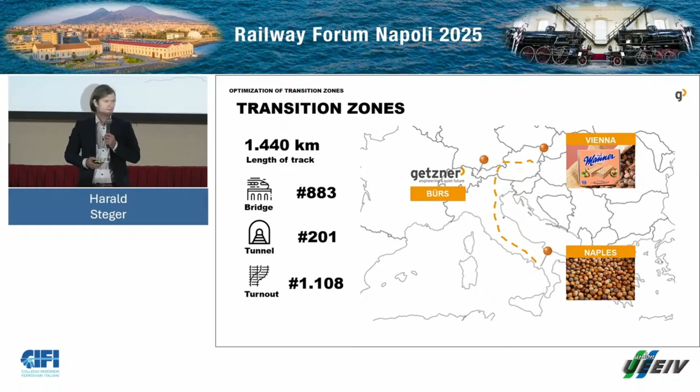But this is not the only cross-link between Vienna and Naples. There's a railway line counting approximately 1,400 kilometers. And if we would let those wafers travel from Vienna to Naples, these wafers would pass by approximately 883 bridges, 201 tunnels, and 1,108 turnouts.

Broken cookies do not have calories. But in analogy to that, how do broken components weigh in the track? So what would happen if this wafer would transit from Vienna to Naples the rough way? This brittle wafer would completely crack.

After the storytelling about wafers, let me now proceed with the technical presentation and the analogy to the transition zones in the railway track.

So what are transition zones in a railway line? We consider transition zones as track areas where we have a change of superstructure that leads suddenly to a change in vertical track stiffness, such as transitions from an open track to a bridge or a tunnel.

Another example is a transition from a ballasted track to the slab track. It could also be a transition from a regular track to a turnout area, or even within the same superstructure, like within slab tracks, there could be transition zones. Yesterday we heard that we sometimes have different spacings available in the same tunnel, and we have to choose different slabs and different mass spring systems, and even there we have to smooth out this vertical track stiffness to optimize the transition zone.

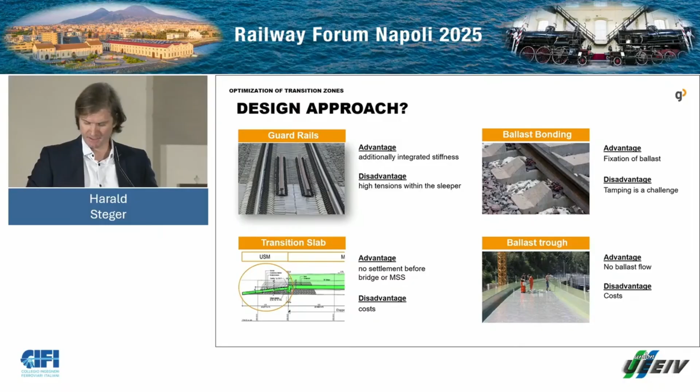Ballast bonding leads to fixation of the ballast on one hand, but is problematic whenever you have to do maintenance work, and it's a hindrance for tamping of the ballast bed. A ballast trough prevents the ballast from flowing apart, and again, it's an individual solution that causes more cost.

Since I'm a Getzner guy, of course, I have to be convinced, and I am, and I'm passionate about that.

The alternative solution to constructive measures is the integration of elastic components. So what is this approach about?

Integration of individually designed elastic components helps us to level out the track stiffnesses. Elastic components ensure that we have a better load distribution, we can elongate the bending line, and this, as a consequence, leads to minimizing of the settlements and improving the track quality, and improving the track quality over the life cycle means also we can reduce the maintenance cost on long term.

Which elastic solutions do we have available? The elastic solutions are available for all kinds of railway superstructures. For ballasted track, we can integrate under ballast mats, we can integrate sleeper beds, or we can do the stiffness graduation with rail pads. For the slab track, we have available mass spring systems, we have insertion beds for sleeper boots, or we can integrate base plate beds.

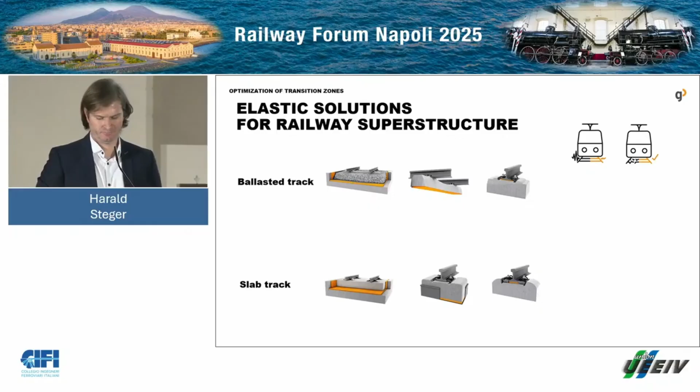When you design a transition zone and you want to optimize this, there arise two questions. The first question is how to smooth out the stiffness changes, and the other one is what is the ideal length for a transition zone.

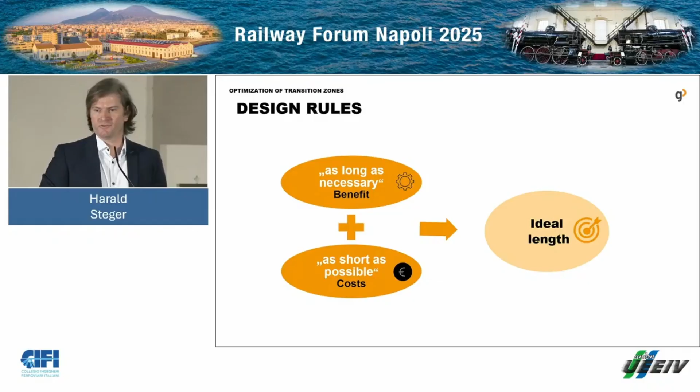And there's first of all a quite generic thumb rule. You have to find a compromise between the technical benefit, that means the transition zone should be as long as necessary. On the other hand, you have to have a view to the cost aspect, and that means it should be as short as possible. At the end of the day, the generic thumb rule leads to the ideal length.

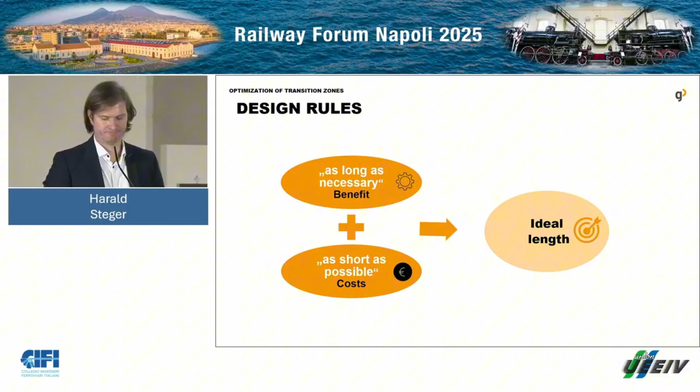But there are also more quantitative rules to design the optimal length of a transition zone. The minimum length should be considered as the distance of the bogie, for instance, 10 meters. And for the right design for the transition zone, there are several rules counting a distance according to the 0.5 second rule, the 0.7 second rule, or the 1.0 second rule. What does this mean? I will bring an example on that.

Imagine you have a train which is running 125 kilometers per hour, and following the 1 second rule, it means this train with this velocity covers a distance of 35 meters within this 1 second. And this brings you to the ideal length of a transition zone.

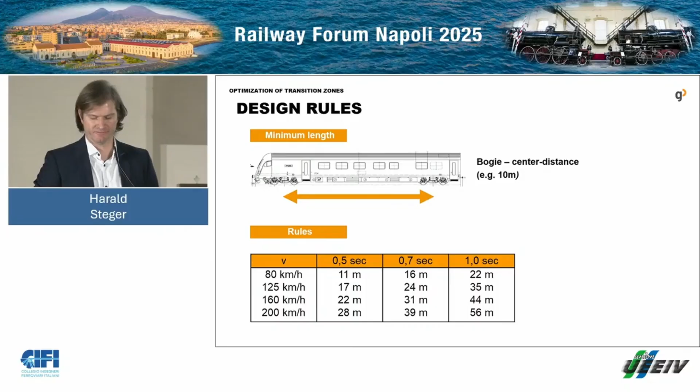When designing and optimizing transition zones by integration of elastic components, we have to find a FEM model that allows us to compute the transition zone as a whole. And therefore, it should be capable to consider different parameters. First of all, we have to have the inputs for the different superstructures. So the model should consider either you have a sleeper for the ballast track or bi-blocks for the slab track, and should also be able to compute the different geometries within this transition zone.

Secondly, since we are Getzner and want to integrate various elastic components, this should also be reflected in the model. Those two columns I would consider as input parameters. And the third parameters that the FEM model should be capable to calculate are the output parameters. As we have this change in vertical track stiffness, we need to be able to calculate the rail deflection as well as the rail seat force and the sleeper tension.

After the theoretical model and our approach, let me introduce you to one of our reference projects we were honored to be participating in. This first reference is located and was projected in Switzerland, in Samedan.

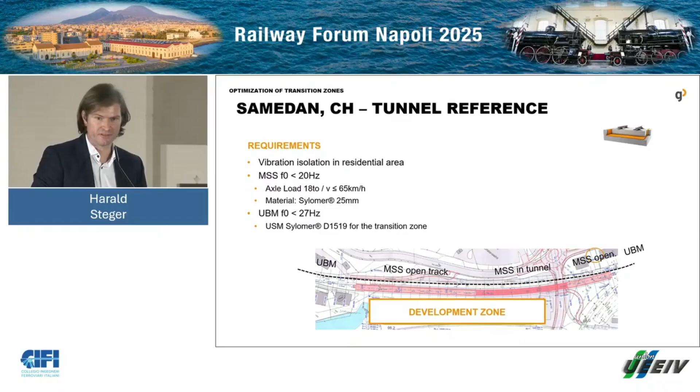In addition to that, this was a combination of constructive measures and elastic measures. There was integrated under the ballast mat area, there was integrated a transition slab. And the requirements for this project was to achieve a minimum difference in vertical rail deflection lower than 1 millimeter at the running train.

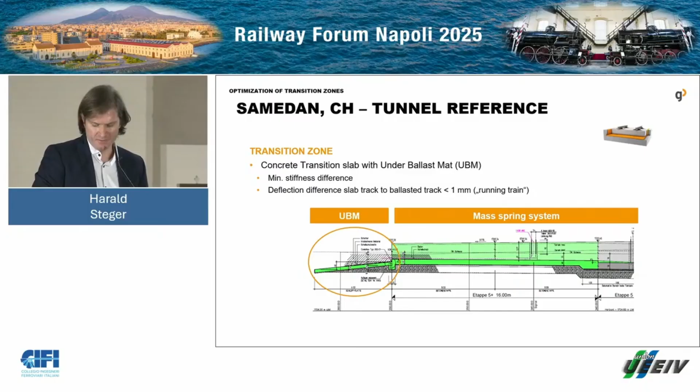This shows the design and the installation. We can see here the under ballast mat on the transition slab. And this panel for the transition slab had a length of 8 meters.

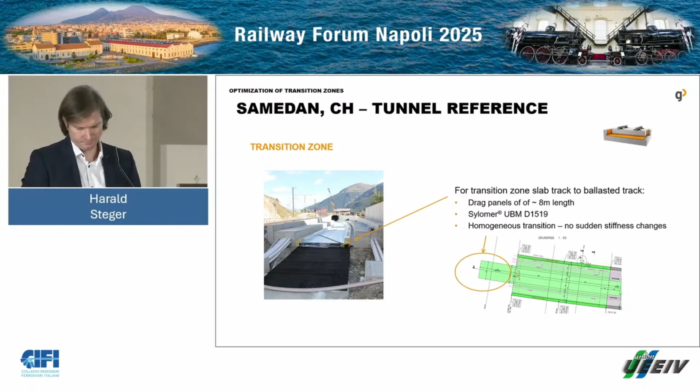Let's switch to the transition zone, which we call turnouts. Turnouts actually define the efficiency of a network. In terms of investment, they cause approximately 1% of investment cost.

At the same time, for maintenance, 25% can be related to turnouts.

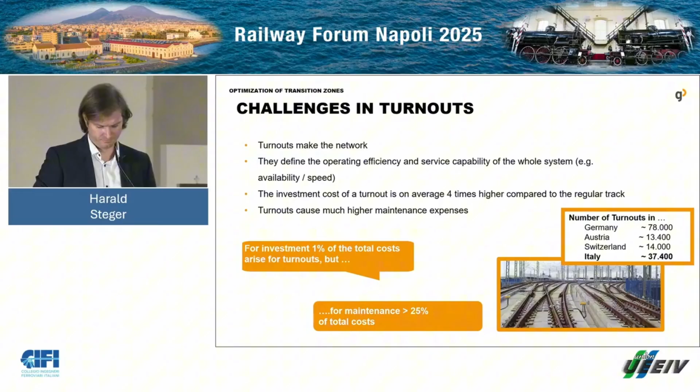A turnout is a transition zone with the highest complexity, an area with the highest discontinuity of track geometry. We have the main track and the side track. When we run over the side track, it leads to a tilting effect. With elastic bearings, you can smooth out this tilting and smooth out the graduation of the stiffness.

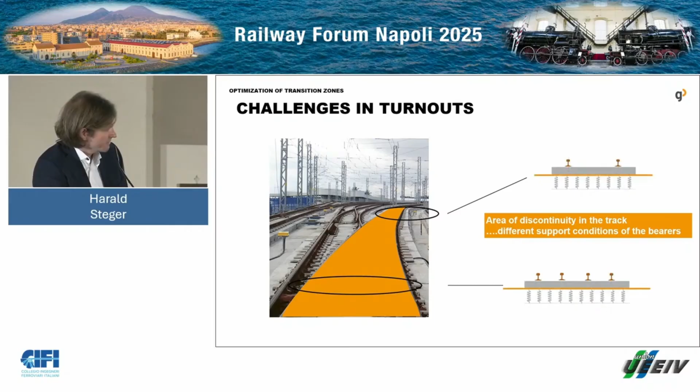Here we can see a sketch of a turnout explaining again the complexity. At the turnout entrance, we have the standard sleepers, and when going along the turnout, we're entering the frog area. The frog area is the most critical area, because there you have the highest complexity of discontinuity.

In the frog area, at the end, when entering the exit of the turnout, you have a transition from the longest sleeper to the shortest, which is the highest complexity in terms of discontinuity and also leads to the highest tilting effect.

So that means the before introduced FEM model needs to be further developed, reflecting the challenges that we are facing in a turnout. That means we have to be able to deal with eccentric load impact and tilting, and also we need to be capable in the model to reflect the different geometries of the placement beds in the fastening above the sleepers.

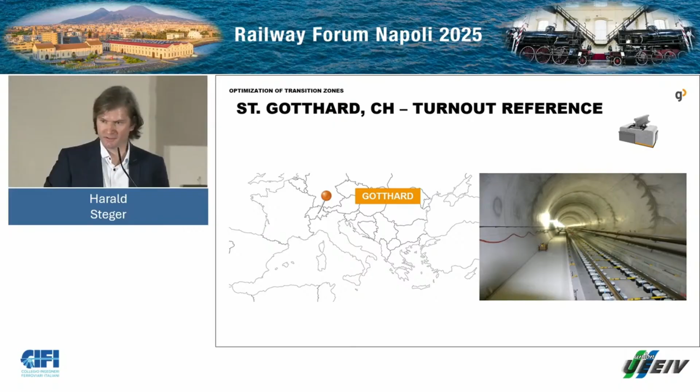Let's continue with one of the projects for turnouts where we had the honor to participate: the worldwide known St. Gotthard tunnel, the longest railway tunnel in the world so far, operated by SBB, constructed between 2009 and 2016. In total, in this tunnel, there were installed more than 400,000 elastic elements from Getzner.

These were insertion pads for sleeper boots. And in this tunnel, there were also 10 slab track turnouts installed by VAE turnout systems.

What was the service that Getzner provided? Together with VAE and based on the input parameters from VAE, we had the honor to do the prognosis for the rail deflection across this turnout, and we made installation plans.

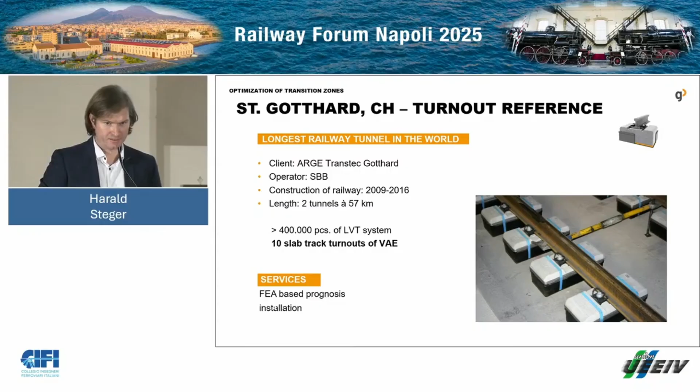What were the prerequisite conditions there? The trains running there had an axle load of 25 tons for the calculation, and the design speed was 250 kilometers per hour, which means the turnout is passed over within 1 second.

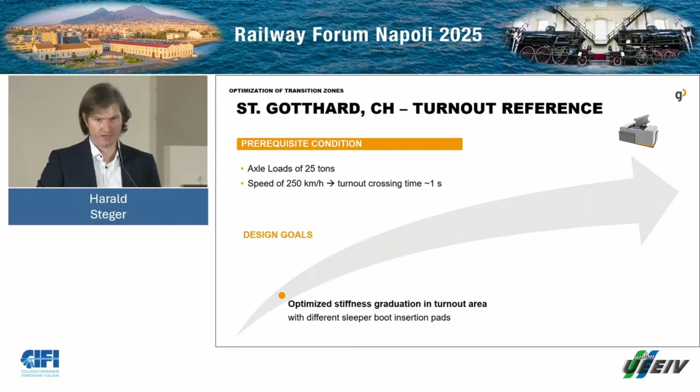The design goals we had to achieve: we needed to optimize the stiffness graduation in the turnout area with different kinds of sleeper boot insertion pads. The transition between the LVT system and the long sleeper had to be considered and optimized, with a static rail deflection in the LVT system in the straight area of approximately 1.5 millimeters. The major goal was to have a maximum difference in rail deflection along the entire switch of less than 0.5 millimeters.

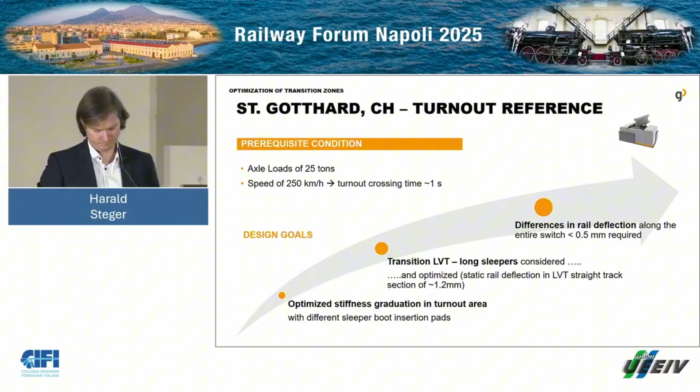Based on the further developed FEM model, we started design, and the solution can be seen here. We have the standard straight track with the LVT system, transitioning to the turnout where we have the long sleepers with insertion bed, a different type compared to the straight track.

In the frog area, it was a combination of two different types to smooth out the tilting and the stiffness change. At the exit of the turnout, we again had the same bed as in the entrance area. So 3 different kinds of elastic beds were integrated into the sleeper boots.

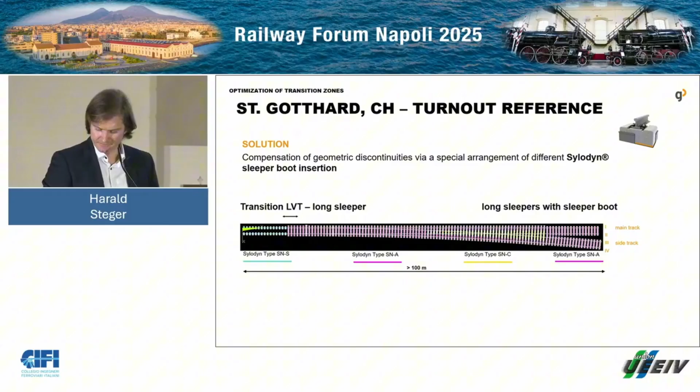And for this, we calculated the rail deflection. First, for the main track. The main track consists of two rails, rail number 1 and rail number 2.

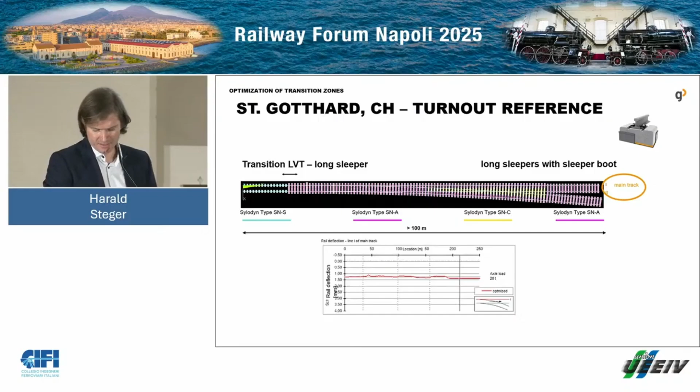Here we can see the rail deflection line for rail 1, and in the critical area where there's the frog, we smoothed out the rail deflection. It's quite smooth. Same for the second rail, and then we built the average for rail 1 and rail 2.

The same calculation was done for the side track, for rail number 3 and rail number 4, and the average was built. Based on this design, we generated the installation plans, and the installation was executed according to our design.

I believe in the philosophy, a job is only done if it's done. What do I want to say with that? First part was done: theoretical model was there, design was done. How to get to the second done, to have the done? We have to get evidence that the theoretical model is verified.

Therefore, the contractor engaged external authority, Technical University of Munich, to conduct tests in the prospective turnout close to the area of Erstfeld in the tunnel in St. Gotthard. The measurements took place with a set of trains of the type ICS with an axle load of 19.8 tons. The trains were operating during the measurements at 250 kilometers per hour on average.

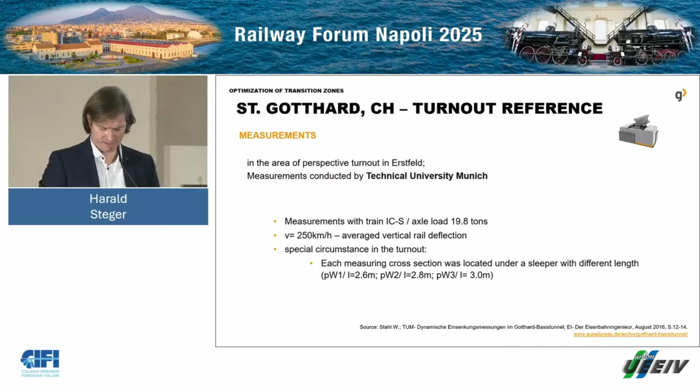There were special circumstances in the turnout for the measurement campaign. Each measuring cross-section was located under a sleeper with different lengths: one under a sleeper with 2.6 meters, 2.8 meters, and 3.0 meters.

In the turnout area itself, specifically in the frog area, the critical area, we had an averaged rail deflection measure of 1.75. So finally, due to my philosophy, the job is done because we have the evidence and we have proven that the theoretical model is the right model.

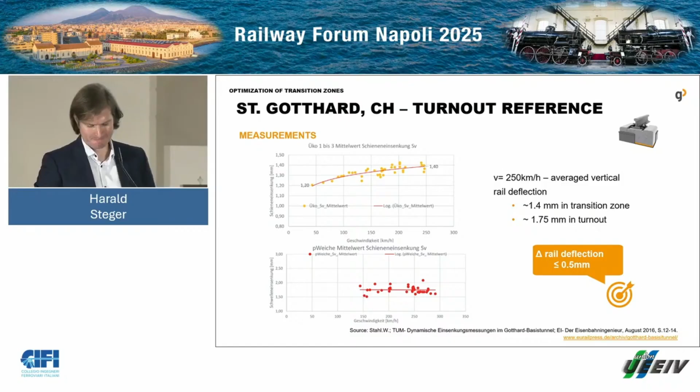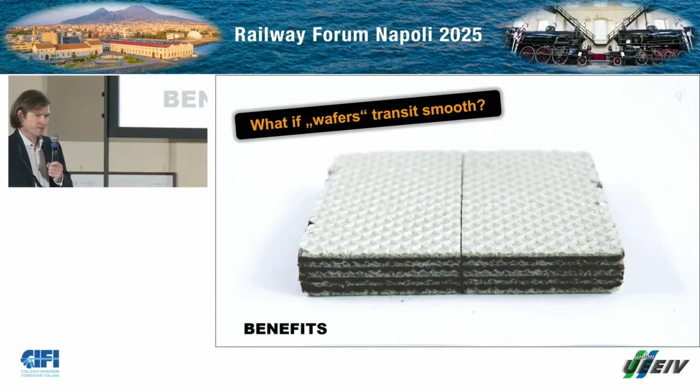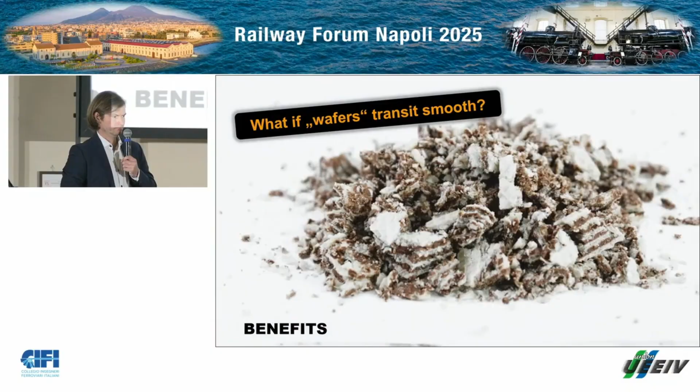I started my presentation with storytelling about wafers. Let me conclude my presentation in the same manner. So what are the benefits for the wafer if you optimize the transition zone and this wafer respectively? The railway components are protected in a smooth way. These wafers would arrive in a perfect condition in Naples.

Let me summarize the benefits of optimization of transition zones. On one hand, by improvement of track quality and protecting the components, you improve operational reliability, you generate higher profitability. That leads to more safety and improvement of track quality at the end of the day.

Now I want to repeat a statement from yesterday from my valued colleague from Rhomberg Sersa, Stefan von Brunn: build and forget is not your approach, it's also not our approach. Build and forget, we completely regret. So what does it mean? You only benefit from the benefits if you're able to have them in the long term, which leads me to the last benefit.

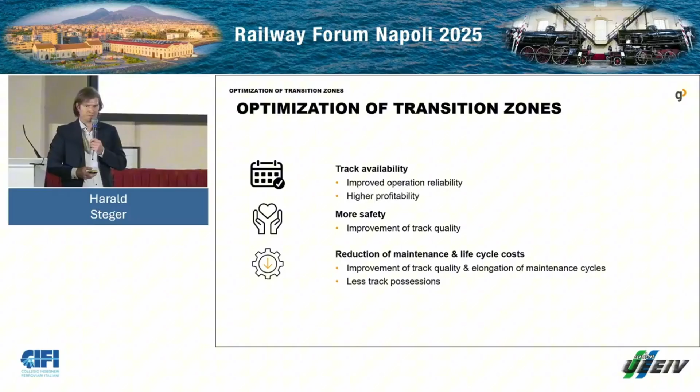The improvement of track quality needs to pay off in terms of the lifetime of our railway superstructure, and needs to reduce the life cycle cost, which is achieved by optimizing the components, optimizing transition zones, and protecting components.

So the key takeaways from today's presentation: transition zones have a really high impact on our railway lines. There's a huge number of transition zones within a line. Remember, from Vienna to Naples, 1,400 kilometers, there were quite a huge number of turnouts, more than 1,000 turnouts. We need smart solutions to cope with the challenges in transition zones, and this allows us to optimize our resources.

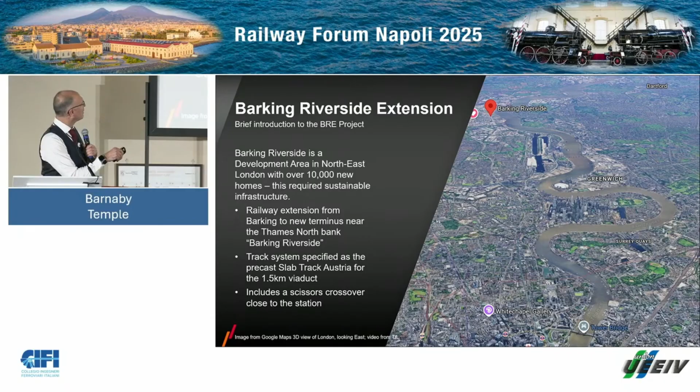So firstly, what is the project, and where is Barking? Barking is in London. If you've ever visited London and been to the Shard, this is approximately an image from Google Maps looking east from where the Shard is. You can see the Tower of London, Tower Bridge, and if you look quite a long way east, you see Barking and the River Thames winding its way.

This project extended an existing line from the station at Barking, hence the name Barking Riverside. The extension took a spur off the line to a new station near the river, to support a big development of new housing. There was a requirement for sustainable transport, and therefore an extension to what became the London Overground extension was decided for the new population.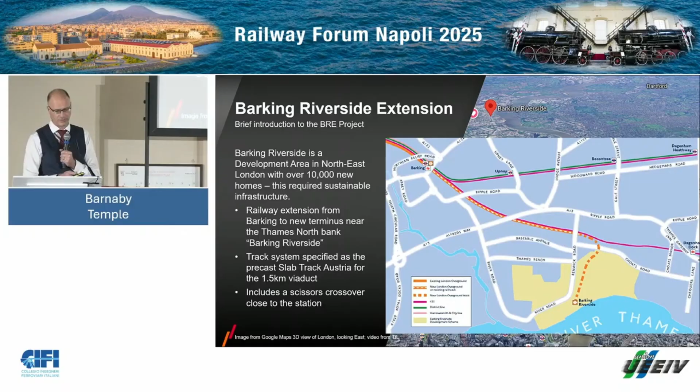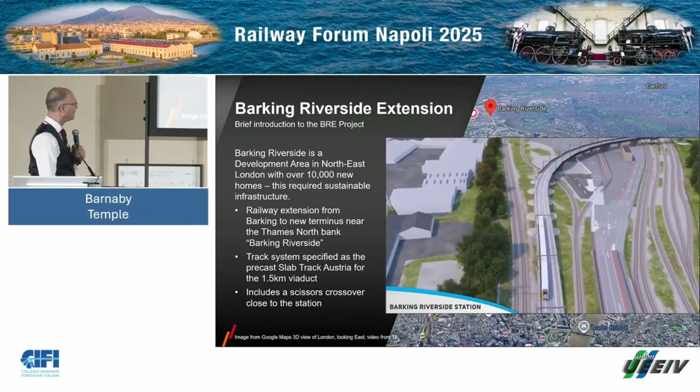Here's a short video that shows the simulation of the project before design and construction. The extension takes its way up a ramp, over some railway lines and a depot, over rivers, then under some power lines, and then takes another curve around the development, schools, houses, past a power station that's there, then through a junction and into the Riverside station.

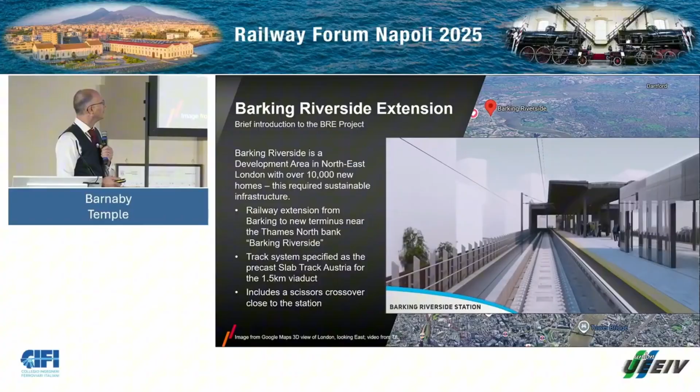If you're sharp, you'll notice square windows in the precast element, which is an indication that it's actually the Porr STA system that was selected for the project.

A little bit on the timeline: our involvement actually started well before construction, in 2017, when Arcadis, who was selected by Transport for London as the designer, needed some help with what the client wanted. The client wanted slab track, specifically precast slab track, and Arcadis didn't have that experience. So we were brought in as advisors to help, and we even took them on a site visit, courtesy of Porr, in Germany, to see some installations, so they got a better feel for what they were designing for, because they were designing the substructures and viaducts.

Moving on a year to 2018, we got involved again, this time directly for Transport for London, because Arcadis had done a track-bridge interaction study. It was important that this got reviewed, because there were some pretty critical aspects for planning, tendering, and construction that the client needed to know but didn't have the expertise in-house for. So we supported them in assessing what the study had shown. And what it showed is they needed to do it again, actually, but we'll come back to that.

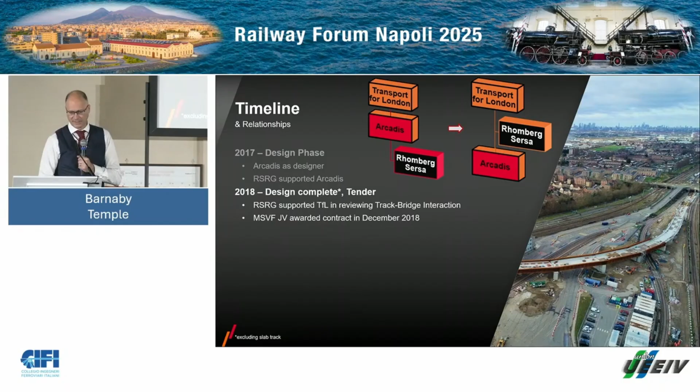The tender for the main works civils contract was completed in 2018 with the appointment of the Morgan Sindall Volker Fitzpatrick joint venture, and we were appointed as their subcontractor for design and build of the slab track. We were supported in that by VCE, our specialist designer. That design process went on until about mid-2020, and if you remember the COVID timeline, that did interrupt the project program a little bit, delaying construction. The viaducts took a little longer because of that, and our installation was still affected by some COVID measures, so there were some disturbances to the smooth running. In 2021 we were able to install the slab track, and the line opened in 2022.

So a little bit more about the route in detail. Firstly, I mentioned the ramp. There's the ramp, it starts just underneath the road bridge, and has to get to a certain height to go over a railway line.

Then there's more railway lines. This is actually a freight depot. And then the High Speed 1 railway tunnels run under here, so a raft was built to help protect that.

And then this curve runs around a 220-meter radius with steel girder viaduct decks, and then onto a predominantly concrete viaduct, all the way through round to the station, which is there at the end. So the junction is there, the station is there.

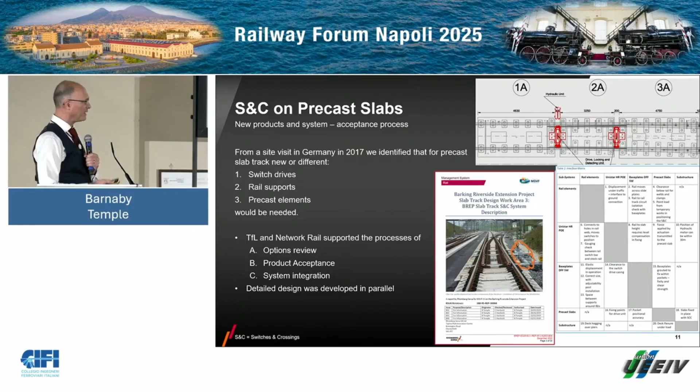So the precast elements, worth a quick mention of why they look a little bit different. For a couple of reasons, we decided not to cast the precast elements with the bolt fixings already in their precise positions. One was because we were on a viaduct, and there was quite some concern that there would be some deflections when casting things in place.

And that was because with a long viaduct deck of 100 meters and a longitudinal drainage concept, the depth of the self-compacting concrete under the precast slabs was quite deep. And therefore, the addition of weight was felt could impact the geometry quality. How significant that was in the end, it wasn't as much as feared, but nevertheless, having a separation where we actually fixed the fastenings in a final step solved that problem.

There was also the question of how good the tolerances would be achieved by not just the precast manufacturer, but specifically also the S&C manufacturer, which had already been selected and was predominantly a supplier for a lot of turnouts for ballasted track. And it wasn't high speed, so there was some concern that if we tried to be too precise up front, then we could have some problems in positioning.

So I'm not going to say too much about elasticity, you just heard from Getzner. The same process was adopted in configuring the baseplate system, which was provided by Schwihag. And there you see the Unistar switch drive system, which had been used in quite a few countries before.

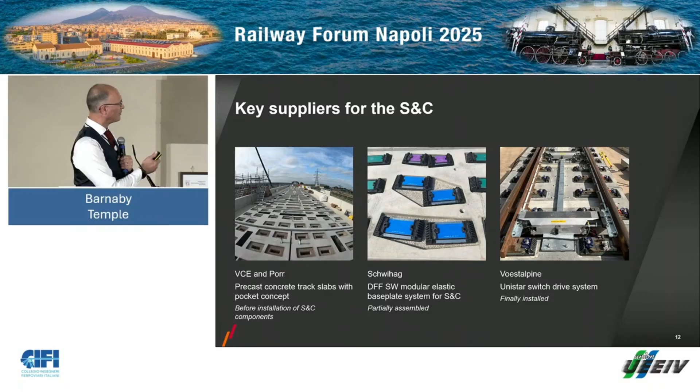So mentioning other people, there was a lot of people to work with on a project, there usually are, but this is just an indication of the range of them. Involved in the track, quite a few different people. Pod Trak were doing welding for us, but apart from that, not too much.

Porr and VCE doing the detailed design for manufacture for the precast panels themselves. And then we had the switch drives, but a different installer. So all of these we had to work alongside. And Network Rail were involved, even though they weren't the project client, they were indeed the end client.

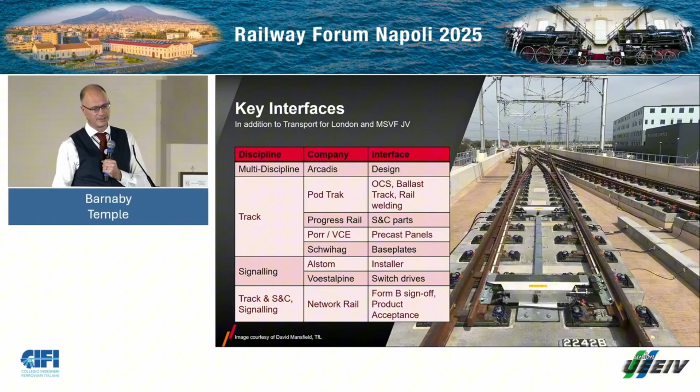The second key issue is track-bridge interaction, and it's a pet subject of mine now.

It's very interesting and not always completely intuitive, but basically bridges do their thing and track has its behavior, and when you add them together they're not always 100% compatible. So it's important to understand that the track has certain levels of stress in it, particularly in curves. There are additional effects in curves, and stresses in rails are different, so that when you superimpose the behavior that a bridge wants to do, which is expansion, contraction, flexure to some degree, the track system has to be able to deal with that.

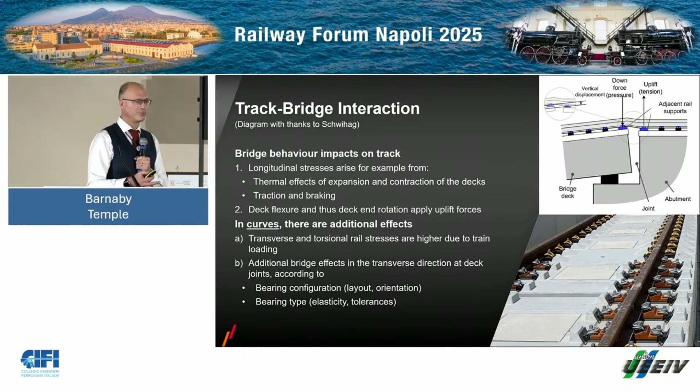So if the bridge designer doesn't really comprehend the seriousness of that, then they can make a design that's actually quite difficult to put a track on. And in this case, we had to deal with some deck end rotations and some translation movements vertically and horizontally at bridge decks.

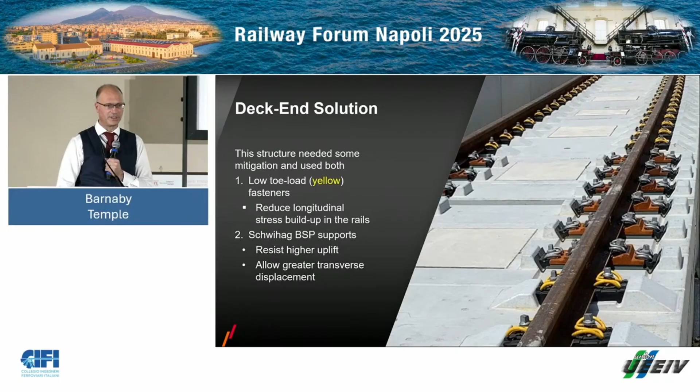Which meant we ended up with a particular arrangement which we'd actually seen in Germany already, the Schwihag BSP support point, which allows a little bit of extra movement and has some uplift resistance. And that, in the design, we proved once we'd fully interpreted the designs done by Arcadis, we were able to implement as a team, with VCE doing the detailed design of the track slabs and the arrangement, fixing those to the deck underneath.

Sounds simple there, but actually it took quite a process to explain the challenge and why it was additional work that we had to do in order to make it function. So it took a few months to get through that process of realizing the change was needed and delivering it.

In total, the design required over 700 panels, but over 100 different geometries, because of the curvatures, because of the deck length limitations, because of some specific details, plus the S&C. There were quite a few different precast shapes required, so that did involve quite an effort from the design team.

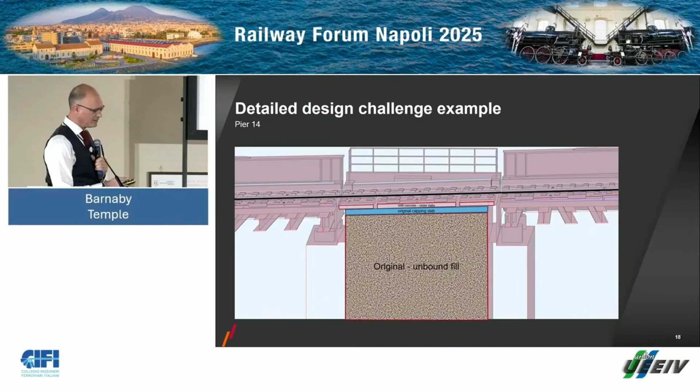Here's one of the examples where we had to get involved and try to adjust the original design. At pier number 14, it was a big pier for an emergency walkway concept, and it fitted between two transport ways underneath. One was a road.

I'm just going to step quickly through the reasoning we had to go through. So the first one was they wanted a big box full of fill, and big boxes full of fill are not that easy to compact. So their design was to sit a capping slab on top of the fill, and then have us cast the track on top of that. And we had to explain in graphic detail why that wasn't going to work.

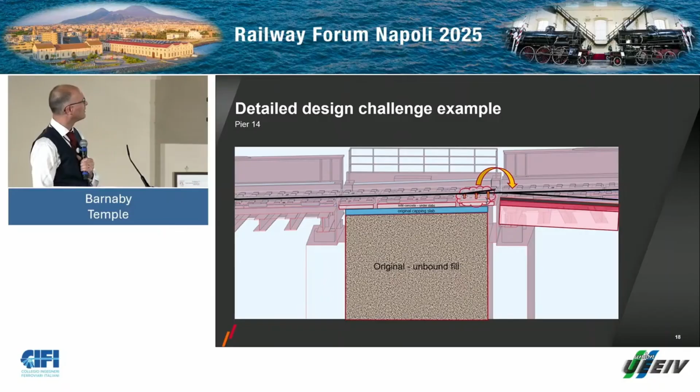So when the deck flexes, you have some uplift. There's going to be some settlement in the fill, which means the track system is going to rotate a little bit. You also have a bit of traction and braking, and basically it's going to crack. It's not going to work, it wasn't going to last.

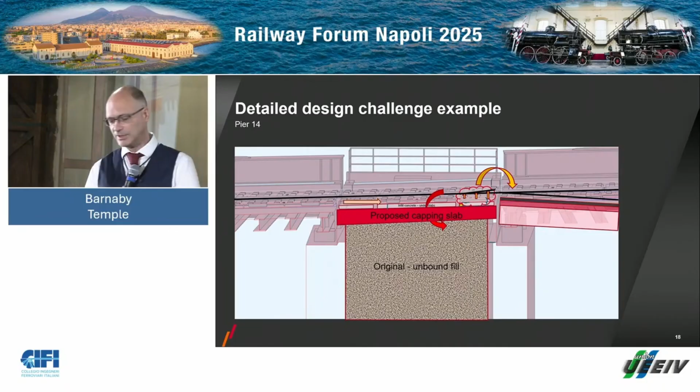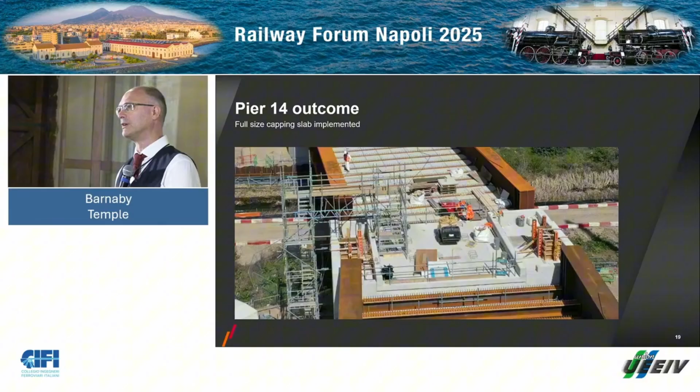So we were able to persuade them, after quite a lot of persuasion, that they really should provide something a little bit different. And indeed, that is what was generated in the end: they designed a trough-shaped capping slab that actually sat on the pier, which meant they didn't have the safety issues of lowering people and plant in to provide the fill.

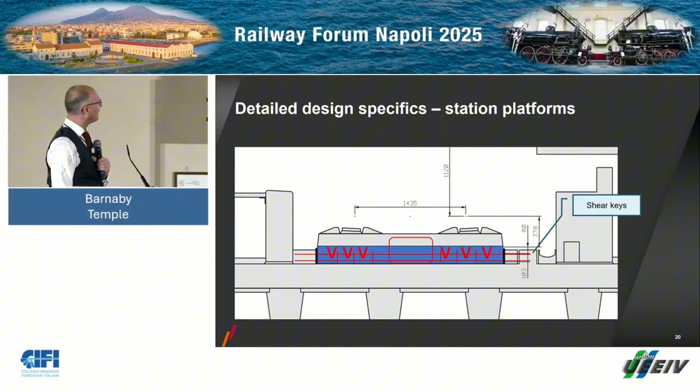The station was also a pretty complicated area. It was done by a different design team from the structures designers, mainly expert in the buildings area, and they gave a very complicated shape that we had to fit with, which had some shear keys, some waterproofing things, and it was quite heavily reinforced. The real challenge was how could we provide the track system into that space in a sequence that would work.

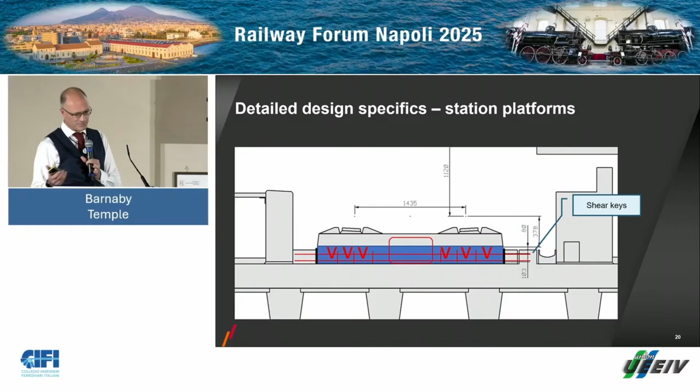This is where the key interaction between construction planning and design really needs to work hand in hand, which is why I mentioned collaboration. It's good to know each other really well and be able to push ideas to and fro to come up with the right solution to make it buildable. In this case, it included development of a piece of plant which had to be bespoke because of the size of everything, which we then used elsewhere on the project.

But we actually ended up designing the concrete layer to be done in 2 stages. One actually supported the plant, and the second one then enabled everything to be delivered. The second stage of concrete was filling in around the slabs.

So we move on to installation. Planning for installation was pretty important. There was quite complicated logistics on the site, so we made use of 3D tools for that.

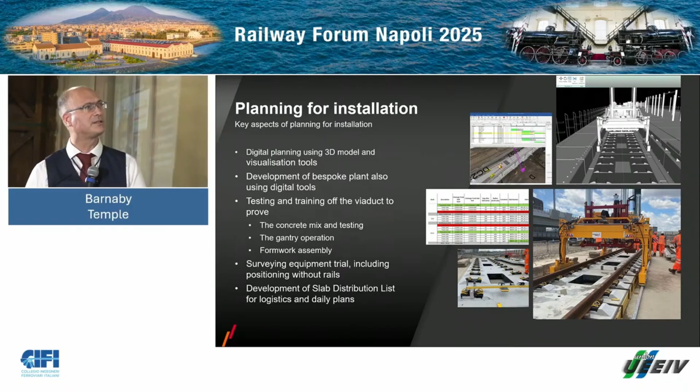This is how we were handed over the viaduct, with stirrups designed to fit the shear keys. This was also designed by VCE. So everything was done on a 3D model to make sure things would fit, and pretty much all of them were cast in the right place.

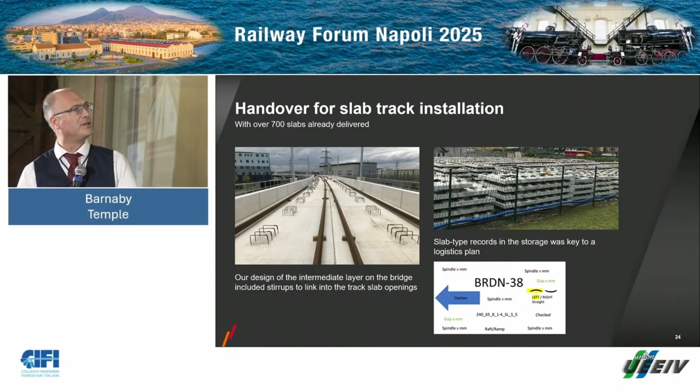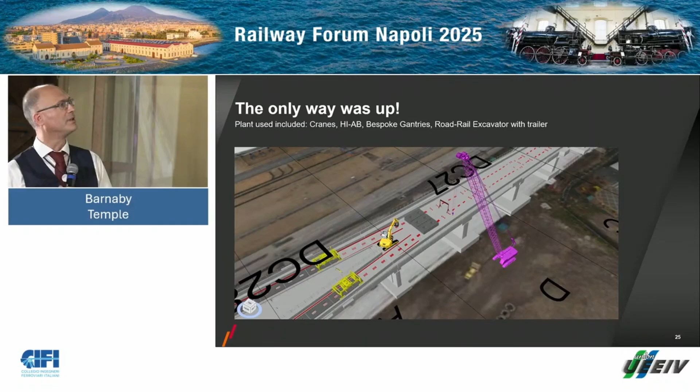Not many changes required. The planning, everything had to be lifted. So there was a place where we could crane things up, and that was the methodology we used for delivering all the slabs, and indeed the plant, to the viaduct.

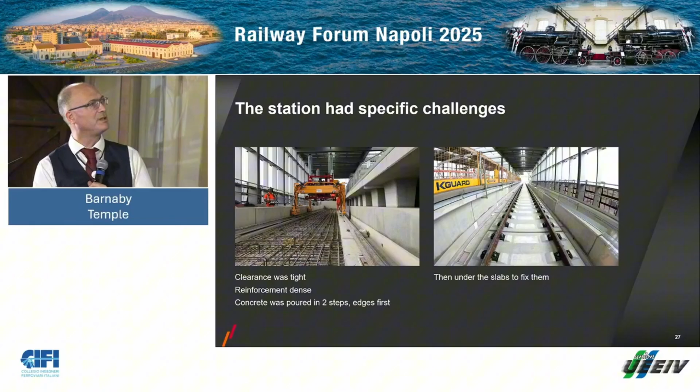The gantries then distributed the slabs into position, in the most part. Here in the station, you see a gantry running on the rails on that side piece, and then on the right you see the finalized condition.

In some places, we could deliver the slabs by crane. At some times, we had to do the final alignment at night. The reason for that was we found the steel girders had an interesting behavior that the designers didn't tell anybody about - because they were weathering steel, which means it's not painted, they're quite a dark rust color, and they actually hogged by up to 16 millimeters in the summer daytime. So we actually had to do the final positioning and casting at nighttime.

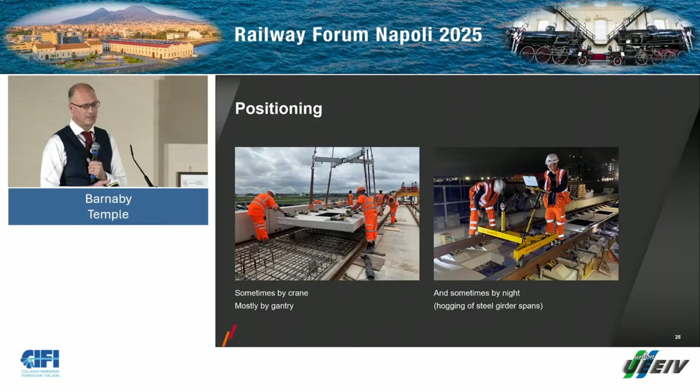We had to install quite a lot of bracing because of tight radii. We really had quite a lot of horizontal forces to counter when we finally got the positioning good. And we had to use a variety of methods of concrete delivery, because the crane couldn't get along the whole way. We had some pumping, we had to use some transport, each of them designed according to need.

Overall, it's a nice result. Nice smooth alignment, despite those challenges. Looks very convenient.

I think that allows me to move quickly onto installation. So, is that going to run? Please, Barnaby, look at the time.

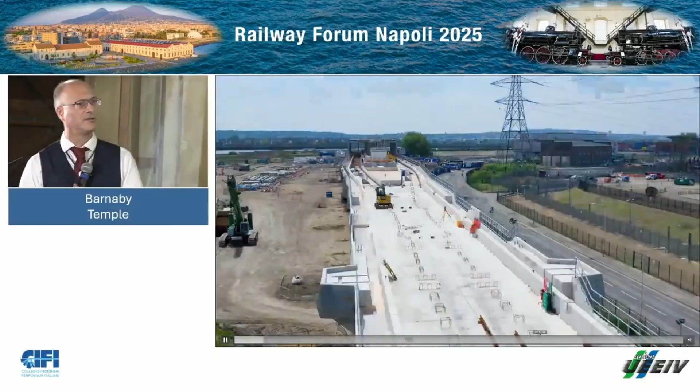So we have a time-lapse video of the S&C construction, which gives an indication of the process. From the bare deck, we had reinforcement because the STC layer, as I mentioned earlier, is a little bit thicker than you might normally have, up to over 30 centimeters here at the ends. Then we have the shuttering, first positioning, concreting of the precast slabs, then a final alignment phase, and everything finished with positioning and grouting of the base plates.

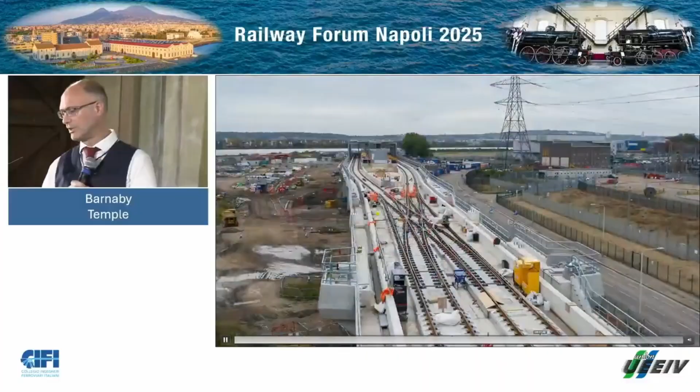And there's some snapshots of that process, so I'm going to fly through those. And there we have the finished S&C. So it's performing very well.

So just quickly wrapping up with some conclusions. I did want to mention BIM again. VCE and ourselves worked with the 3D models, but one thing we did learn, it's not just a question of working in 3D. Implementation actually involves some other dimensions, temperature and time, because with dead load, bridge decks do actually deflect, so therefore understanding your positioning and understanding your structures is pretty important.

And then finally, really, track-bridge interaction, a little bit like was mentioned for the acoustics. It's a cyclic process, really, ideally. Involve your specialists at an early stage, not just one discipline, but both. The track engineers with some knowledge need to be there when the bridges are being conceived.

And final slide, the conclusion. It was opened in July 2022. The track took 4 months, 711 precast slabs, quite a lot of self-compacting concrete, a total slab track route length of 1.7 kilometers, and the client is very happy. So it was a good conclusion.

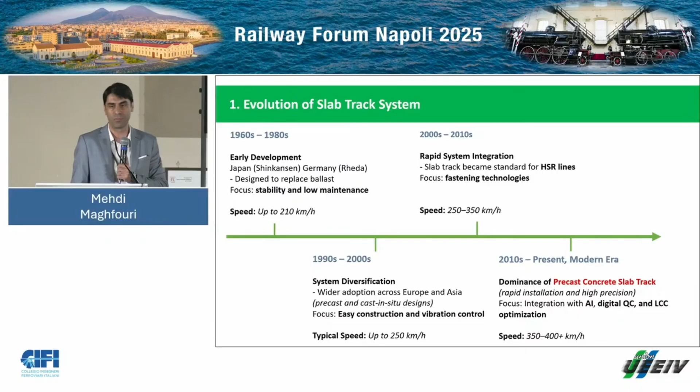But why is there a global preference for the slab track system? Basically because of precision and quality, fast construction and reduced disruption, enhanced durability, lower life cycle maintenance, and proven reliability. I will go through each point and discuss with some examples.

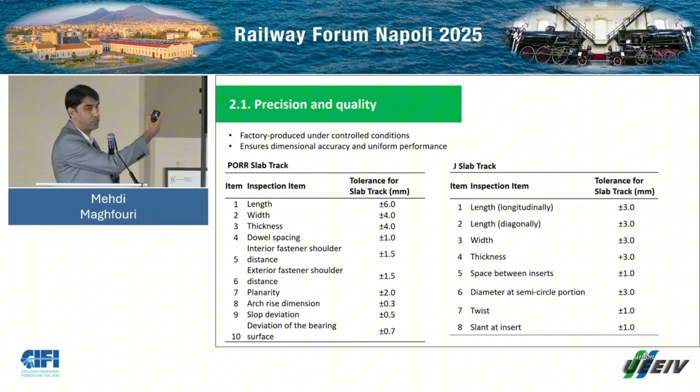We always talk about precision and quality, but how precise should the slabs be? Here I have two examples of two systems, PORR and Shinkansen system, that we are working on. Under the J slab, the length of the slab is about 5 meters, but we have a tolerance of only 3mm. It shows how accurate it should be. We always talk about precision, but we also have to consider how sensitive the production of the slab tracks is, to achieve this kind of strict tolerance.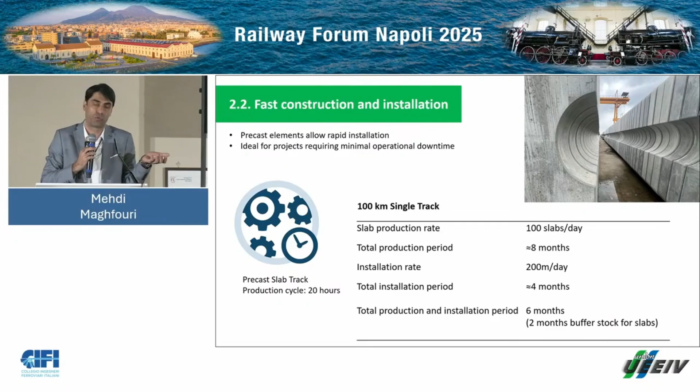Because nowadays, I categorize durability into materials, design, and tests. Coming to materials, by having advanced concrete technology and using supplementary cementitious materials, we can enhance the microstructure of the concrete to guarantee a minimum life cycle of 50 years. Not only the material, but also we have to do the tests.

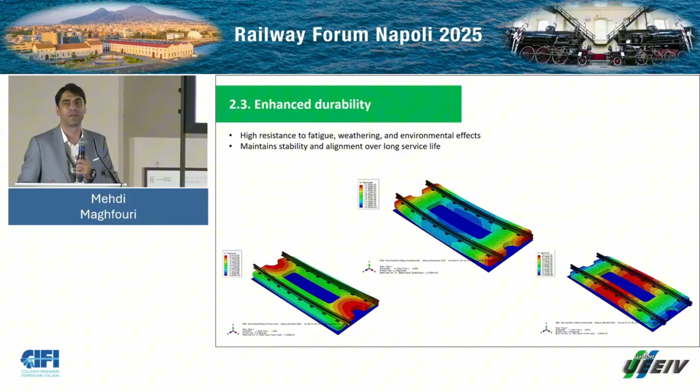We do the static load test, dynamic load test, as well as the thermal gradient test. We test different temperature differences on the top and bottom surfaces of the slab, to know if it would be durable under different temperatures, and also check the deflection. That shows a perfect result, which is why we say the slab track system is durable and reliable.

We are talking about lower life cycle maintenance. The first thing that comes to mind with slab track is that it's quite expensive - actually, very expensive. According to the Japanese, about 1.5 to 2 times higher than the ballasted track.

But the key point is the maintenance cost. Some companies say the maintenance cost could be zero - maybe he's right, but let's consider at least 25% compared to the ballasted system, which is significant. After 10 to 12 years, according to the Japanese, we can have a balance between cost and maintenance, which is excellent. Similar studies done in Europe confirm this.

All right, we talk about the reliability of the slab track. So many projects have been done - I'm focusing on Asia. In China, 48,000 kilometers of high-speed rail slab track system is already operational, at speeds of 350, and as I told you recently, up to 420.

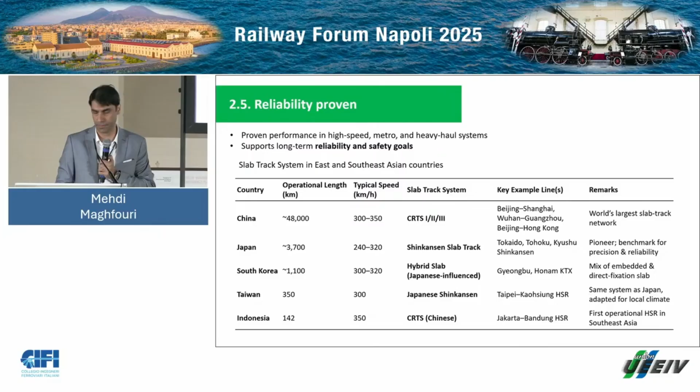Talking about the cost share of the precast slab track - it's about 15% of the total project cost, while rolling stock is 15%, electrification and signaling 15%, stations and construction 20%, and tunnel 35%. 15% is significant, meaning we have to be so careful when producing slab tracks - there's no room for loss or rejection. That's why resilient slab track comes into the picture.

Before discussing defects on slab tracks and preventive measures, I'd like to draw attention to the manufacturing and installation process. The first stage is reinforcement cage making, which can be done in parallel with mold cleaning and preparation. Once mold cleaning is done, the fabricated steel cage can be placed inside the mold, followed by concreting. Before concreting, we need inspection of the reinforcement and mold, to avoid issues later, then proceed with concrete pouring.

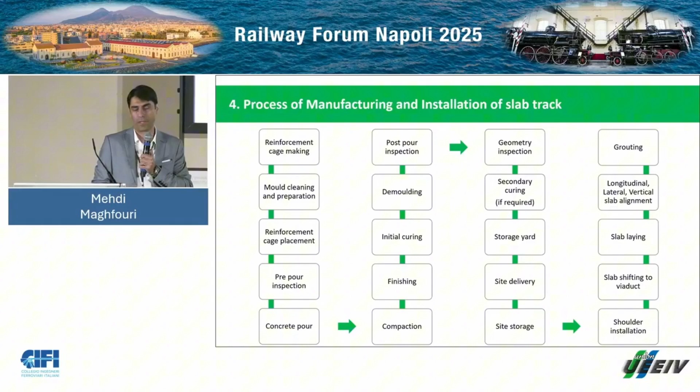Grouting could be either SCC or cement asphalt mortar. System by system it could be different. All right, so...

In the coming 4 slides, I'm going to discuss what kind of defects can occur. Actually, there are many types of defects, which shows how we have to be careful during the production process and installation to avoid all those defects.

Mold cleaning, as I just mentioned, is one of the steps. If proper mold cleaning is not in place, poor surface finish, bugholes, and edge defects might happen. What we can do is remove the hardened concrete, inspect the corners, joints, and insert locations, apply release oil, and clean insert seats.

Mold geometry is another important item. If you don't have proper mold geometry, rounded edges, uneven surfaces, and gaps in mold joints can happen. So we have to verify the dimensions and ensure proper joint closure. In different projects, we've struggled a lot with clients and consultants over this, so that's why I'm highlighting these points.

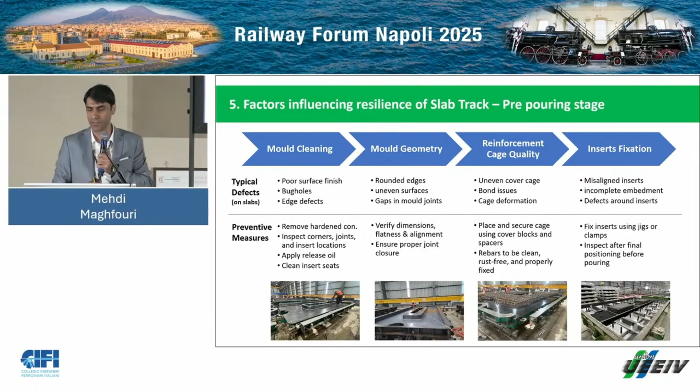This is also very important. Most of the rejections come from this particular point. So we have to use jigs or clamps to fix the dowels or inserts, and inspect the final position before pouring.

Concrete quality matters a lot, because this is a concrete product, so many problems also come from the concrete. Segregation can happen, bleeding on top, and strength or durability could be a weak point. So we have to have a proper batching plant system and proper concrete transportation.

It's very important for the production of the slab track, such a precise product, to have a fully automated system—for example, a fully automated batching plant and a traveling bucket to transfer the concrete from the batching plant to the discharge point.

For example, in Japan they are still using truck mixers for the same system—I'm in contact with my friends in Japan working on the same Shinkansen project, which is in progress. They are still using that traditional system, but with low quantity of product. Once we move to massive production, we need a high level of automation.

Without uniform concreting, uneven concrete pouring can happen, leading to voids or honeycombs. So the concrete shall be discharged layer by layer with proper vibration. The duration of everything is really important—either pneumatic or electric vibration, mold vibration shall be used, with adequate vibration frequency.

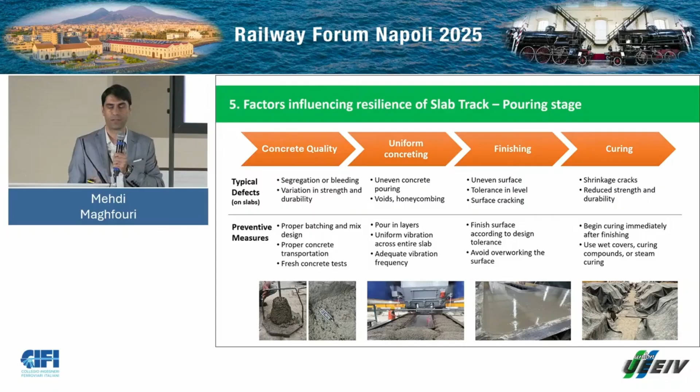Most of the defects actually come from the curing, because if we don't have proper curing in place, we will have different types of cracks, like shrinkage cracks, plastic shrinkage cracks, and so on. That's why the curing also shall be controlled. Concrete maturity is important too - if concrete is not mature enough and we start demolding, some defects like cracks or edge damage could happen to the slabs.

For example, proper demolding tools must be applied, with gradual and uniform release pressure. If we don't use the proper demolding equipment, we will have a lot of issues with defects on the slabs. We have faced this problem, we have faced this issue. That's why a proper frame shall be designed and implemented for the demolding.

And then lifting - some cracks or defects can happen during lifting, so correct lifting points and anchors, and checking the crane capacity before lifting, shall be carried out.

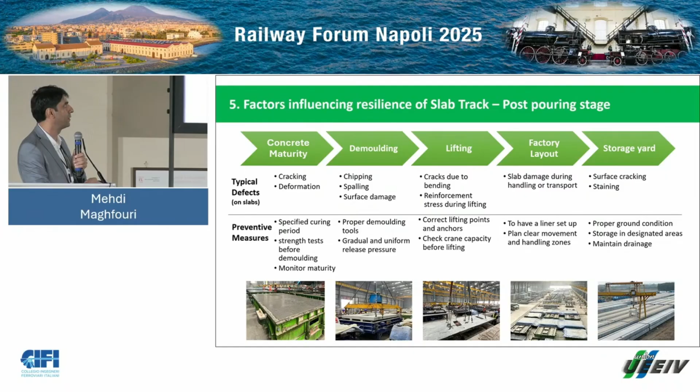The factory layout is very important because we don't want too much handling. The more handling, the more defects might happen. That's why it is strongly recommended to have a linear factory layout, and the storage yard, of course, should be leveled and have a proper ground surface.

Then the transportation - some cracking and surface damage also happen during transportation. Use a level surface, use proper spacers, and avoid excessive stacking. And then site handling and grouting - these items must basically be considered to avoid the defects.

So I already categorized the defects. First, we have to study the root cause and do analysis. Once we know them, in case a defect happens, the first thing is to define acceptance criteria and then come up with a method statement and obtain approval from the designer or the client. Then, based on the defect, if it is repairable, we can do the repairing and conduct the final inspection, and the slab would be ready to use.

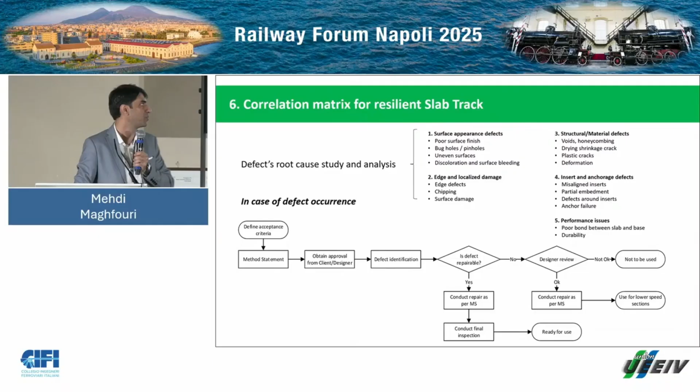If not, then designer review must come into the picture, and if it's okay, then we can do the repairing and use that particular stuff for sections with the lowest speed. If it's not okay, then of course the slab would be rejected - that we don't want. So the last slide is just a conclusion.

I would say that we have to train our production and installation team regularly. The concrete mixture must be optimized to suit the purpose for slab track production, and a high level of automation for concrete production and distribution shall be in place. Control the curing environment, and ensure a high level of accuracy and durability of the mold.

Mold is very important. If you have a complicated mold, basically the demolding would be very difficult and tough, with so many defects. Demolding criteria and equipment shall be in place, minimize indoor handling of the slab track, and handling and transport protocols shall be established, and inspect the procedures from time to time. Last but not least, defect identification and remedial action according to the approved method statement.

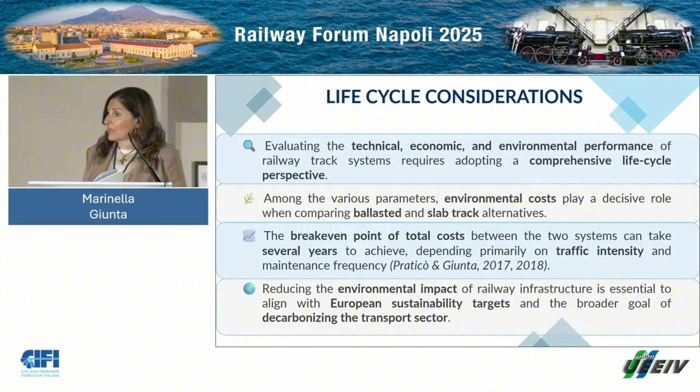This depends on the traffic intensity and the maintenance frequency of the ballasted track. Reducing the environmental impact of railway infrastructure is essential to align with the European sustainability target and the goal of decarbonizing the transportation sector. I would remind you that 25% of carbon emission in the world is produced by the transport sector.

Building on this consideration, the objective of the study I'm presenting - a study elaborated with my research group at Mediterranea University of Reggio Calabria - is to evaluate the environmental performance of slab track systems through the life cycle assessment methodology.

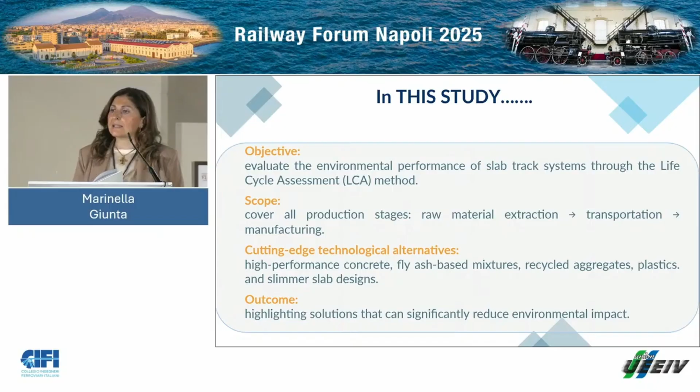The scope of the study covers all stages of the production of the slab track: raw material extraction, transportation, and manufacturing. The study considers cutting-edge technological alternatives such as high-performance concrete, fly ash-based mixture, recycled aggregate plastics, but also slimmer slab designs, with the final objective of highlighting a solution that can significantly reduce the environmental impact.

The method applied is the life cycle assessment, carried out according to the framework established in the ISO 14040 standard. A life cycle assessment encompasses 4 stages: goal and scope definition, life cycle inventory, life cycle impact assessment, and interpretation of the results.

We made the life cycle assessment of the different alternatives of slab track by means of the software OpenLCA, and using the EcoInvent database for the processes.

In order to estimate the life cycle impact, we applied the ReCiPe method, the midpoint ReCiPe method, and we considered 18 impact categories. We quantified 18 impact categories.

Before making the environmental analysis, two important elements must be defined: the functional unit and the system boundary. The functional unit is the reference unit for evaluating the performance of a system and for making the comparison among different alternatives.

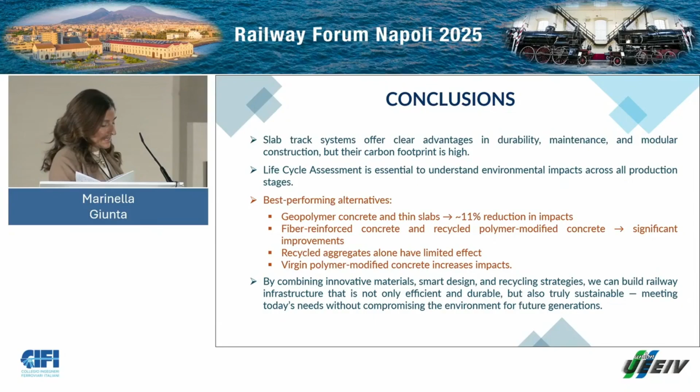This study belongs to a wider research project carried out within MOST, the Sustainable Mobility National Center, spoke for railways. Thank you for your attention.